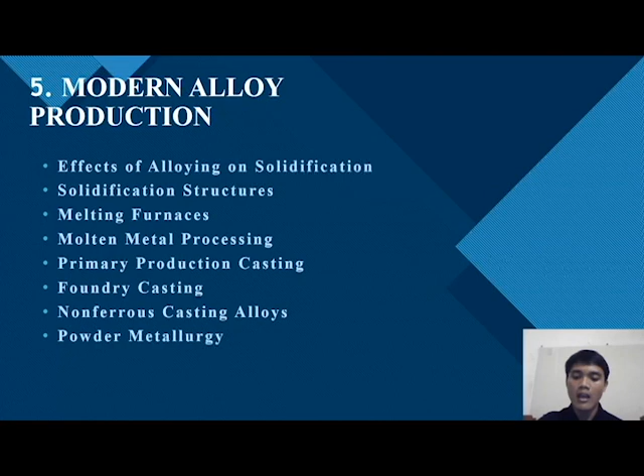Now we go to the effect of alloying on the solidification. The solidification of alloys is a complex process, and it is most easily understood by examining how the solidification characteristics of alloys differ from those of pure metals.

The solidification of pure metals: when a pure metal begins to melt, the solid-liquid mixture stays at the melting point temperature until all of the solid has completely melted. The amount of thermal energy needed to complete the transformation from solid to liquid is defined by the latent heat of fusion of the material. For example, pure aluminum begins to melt at a temperature of

660 degrees Celsius and has a latent heat of fusion of 398 kJ/kg. If 1 kg of solid aluminum is heated to 660 degrees Celsius, then the addition of 398 kJ of thermal energy will be required to completely melt the aluminum.

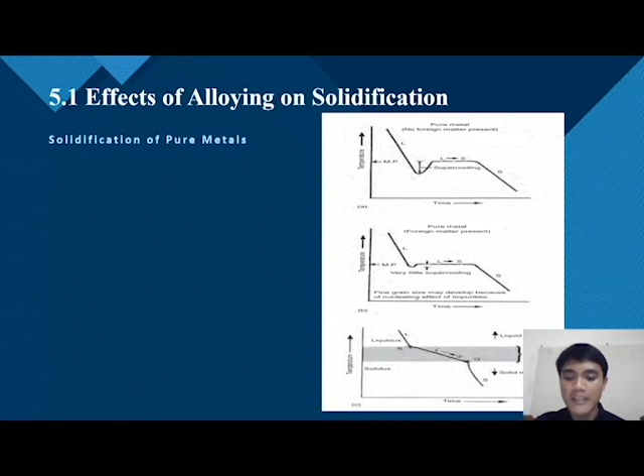Next we go to the solidification structure. The solid-liquid interface during solidification normally exhibits one of three types of crystal growth into the liquid: planar, cellular, or dendritic growth. The type of growth is controlled by the manner in which heat is removed from the system.

When the liquid ahead of the solid-liquid interface has a positive temperature gradient, heat is removed from the liquid by conduction through the growing solid. Because the temperature gradient is linear and uniformly perpendicular to the interface, a smooth interface is maintained and the growth is planar into the liquid.

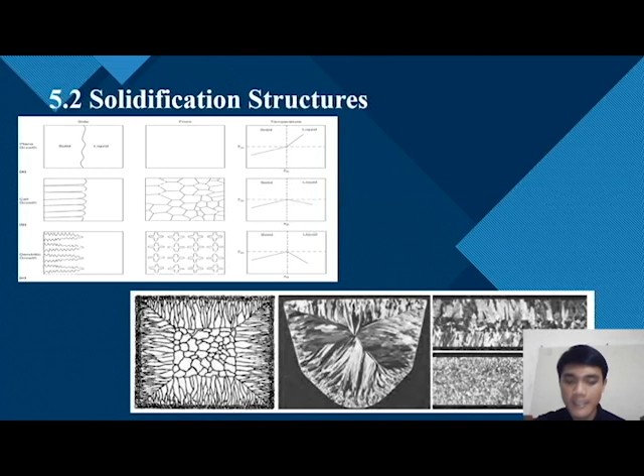Next we go to the melting furnace. A wide variety of furnace technologies are available for melting metals. In steelmaking, for example, pig iron is produced in a blast furnace from iron ore, limestone, and coke, and it contains excessively high levels of silicon, manganese, carbon, and other elements.

In the furnace we have three types. The first is the induction furnace. Induction furnaces are very advanced, are made in many different sizes, and are relatively simple in design and operation. As you know, these advantages have had a decisive influence on the rapid increase of metal production by VIM, like

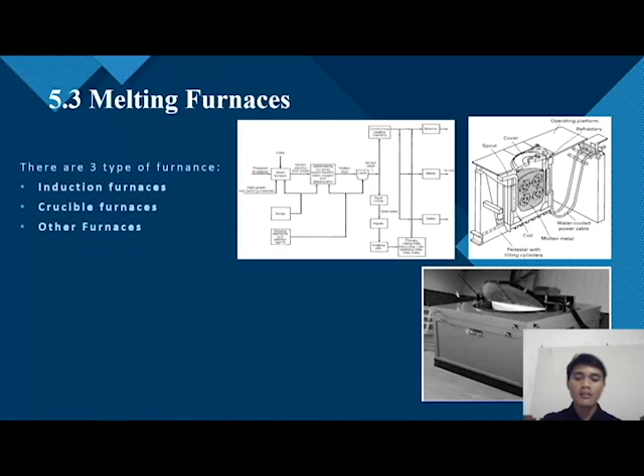And next, we go to molten metal processing. Molten metals are processed and handled in various ways depending on the alloy and the melting practice that are used. Melting is a basic way of combining elements for the purpose of alloying, and the overall chemical composition of the molten alloy must be carefully controlled and processed before casting can take place.

Now we go to the fluxing of metals, often the first step in obtaining a clean melt. Fluxing is a term commonly used in foundries and melting departments that refers to the molten metal treatment from the addition of reactive chemicals, compounds or inert gases.

The various functions of the molten metal fluxing additives, either singly or in combination, include removing inclusion impurities or dissolved gases from the melt, preventing excessive formation of solid phase inclusions, preventing and/or removing oxide buildup on furnace walls, and the last one is injecting or distributing

alloying constituents. In iron and steel making, for example, the function of the flux is twofold: to render the high melting refractory oxide impurities fusible and separable from the molten metals, and to provide a medium with which the impurity elements or compounds would combine in preference to the metals.

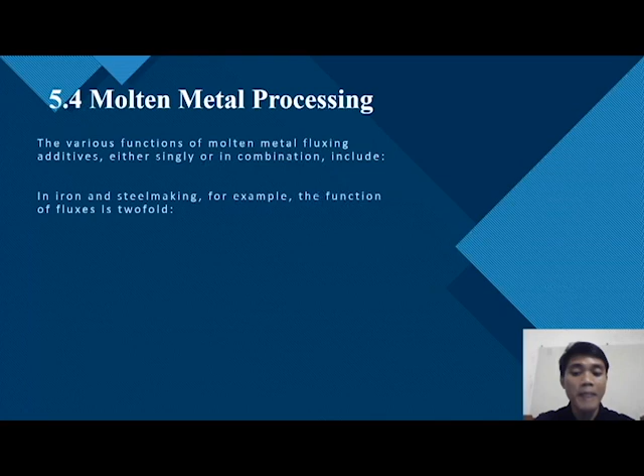And then next we go to primary production casting. The primary production casting of metals normally involves either ingot casting or continuous casting of products such as strip, sheet, wire or bar. Continuous casting offers certain benefits over static casting, but not all metals can be continuously cast.

In static ingot casting, several ingot casting processes have been designed and developed for downstream manufacturing processes. The most common is straight ingot casting, where molten metal is poured into a vertical, open-ended mold. The mold is made of metal, usually cast iron, and is tapered along its length so that solidified metal can be easily withdrawn from it.

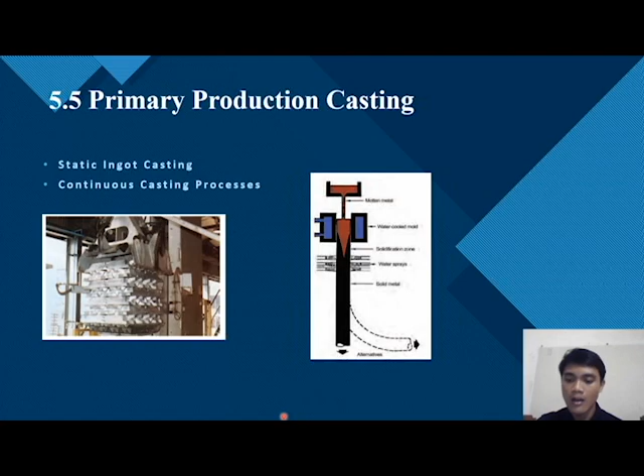As you can see in the picture here, this is an automatic stacker of ingots for foundry remelting, courtesy of the light metal age. And here we can see causes of cracking during forging, rolling or extruding, including metal impurities, non-metal impurities, slag, dross and flux inclusions, invariant microstructure, segregation, surface cracks and internal cooling cracks.

And the next is the continuous casting process. Continuous casting may be defined as the continuous solidification and withdrawal of product from an open-ended shaping mold. The earliest methods of continuous casting occurred in the 1800s with patents by Sellers for the manufacture of lead pipes in 1840 and by Laing in America for continuous casting of non-ferrous metal tube in 1843. And you can see here a schematic of the vertical continuous casting process.

Next we go to foundry casting. Foundries use various methods to cast parts with complex shapes and interior surfaces. Molds are made in a variety of ways so that the molten metal poured into the mold cavity results in a part with the shape and dimensions of the finished form. The shape casting methods can be divided into three broad categories.

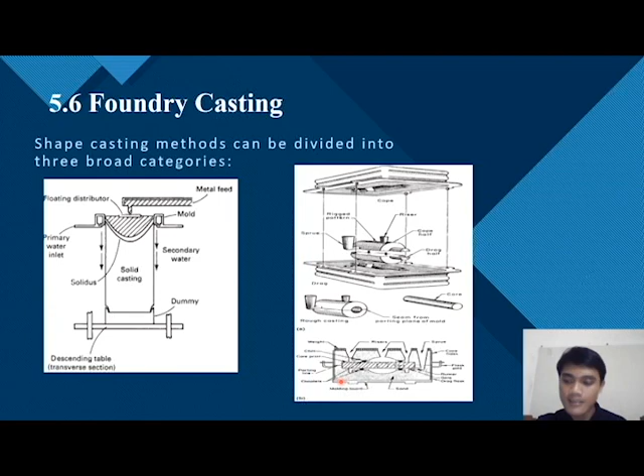As we can see in these two pictures, here is the schematic of the mold for direct chill casting of aluminum ingot. And here are the major components of the sand mold: A is the pattern assembly for cope and drag section, and B is the cross section of the mold with core.

Next, we go to the non-ferrous casting alloys. In terms of tonnage, cast iron is the most common foundry alloy, constituting approximately three-quarters of the worldwide production of castings. For example, the 40th census of world casting production tabulates the total worldwide production of castings in 2005 at 85,041,078 metric tons. Tonnage of the cast alloys in that year was distributed among the various alloy systems as follows. Like here we can see gray iron has 40,007,088, and the total with all of this is 85 million.

Next we go to the aluminum casting alloys. Aluminum casting alloys are the most versatile of the common foundry alloys and generally have the highest castability rating. As casting materials, aluminum alloys have these favorable characteristics: good fluidity for filling thin sections, low liquidus temperature relative to those required for many other metals, rapid heat transfer from the molten aluminum to the mold, providing shorter casting cycles, and hydrogen is the only gas with appreciable solubility in aluminum and its alloys, and hydrogen solubility in aluminum can be readily controlled by processing methods.

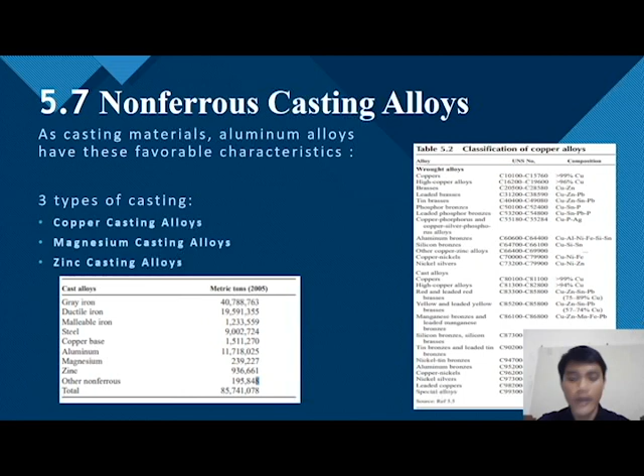And next we go to the last subchapter, powder metallurgy. One of the more recent metallurgy developments in the manufacture of modern alloys is the development of powder metallurgy, or PM processing. Metal powder can be produced using a wide variety of mechanical methods as well as by chemical and electrochemical methods. The general type of atomization process encompasses a number of industrial and research methods.

Industrial methods include two-fluid atomization, where a liquid metal is broken up into droplets by impingement of high-pressure jets of gas, water, or oil, and centrifugal atomization, where a liquid stream is dispersed into droplets by the centrifugal force of a rotating disc, cup, or electrode. And vacuum or soluble gas atomization, where a molten metal is supersaturated with a gas that causes atomization of the metal in vacuum. And the last one is ultrasonic atomization, where a liquid metal film is agitated by ultrasonic vibration.